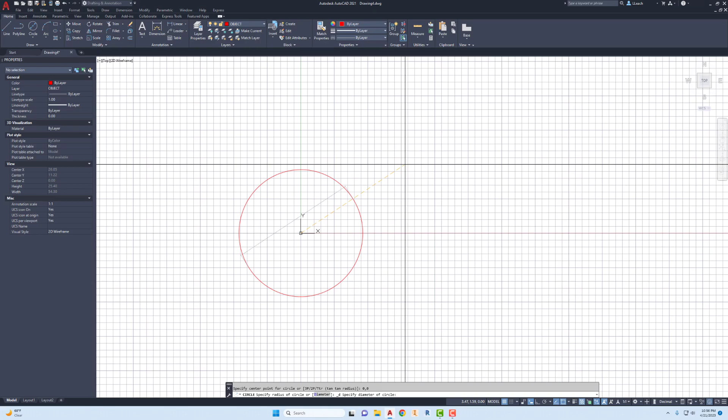Press enter. Let me pan over here a little bit. Then the diameter of the circle, I'm going to do the smaller one first, so that has a diameter of 1. Just going to type in 1, press enter. Let me zoom in a little bit.

I'm going to make another circle with the diameter, and click on the center of the circle. If you don't see that little green circle pop up, go over to your object snaps and make sure you have center selected. Also make sure you have endpoint selected because we're going to need that in a minute. I think all the other ones are fine, so that's probably all you need is endpoint and center checked. I'm gonna click out of this.

I'm gonna start a circle, center, diameter. My center is here, I'm gonna drag it out, this is gonna be a diameter of 2. Let me pan out a little bit or zoom out a little bit. Actually, what I'm gonna do is turn my grid off because that annoys me. Turn that grid off like that.

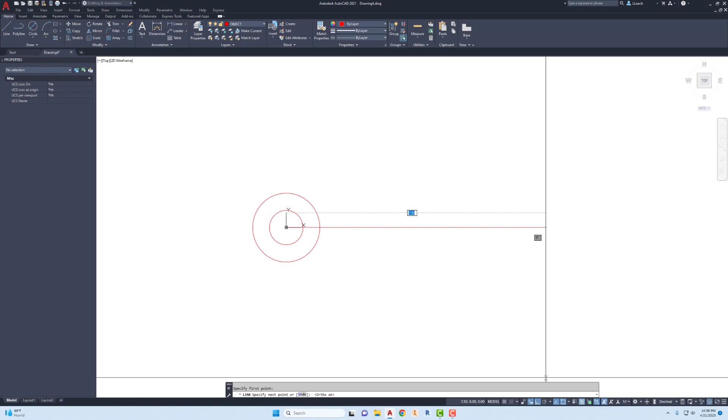So what I'm gonna do is draw a line from the center of those two circles straight over to the right. If you notice, I'm kind of at an angle. To make sure I get this perfectly horizontal, I'm gonna click on my, what is this called? Oh yeah, the ortho mode. So now I can drag it over to the right. That's gonna be 3, so I'm gonna type in 3.

Hit the escape key. I'm gonna draw another line from the same center point here. This time I'm gonna come over, I'm gonna type in at 3, and then I want to do the less than 40. So that's gonna be a line that's 3 units long at a 40-degree angle. I'm gonna press enter and hit the escape key.

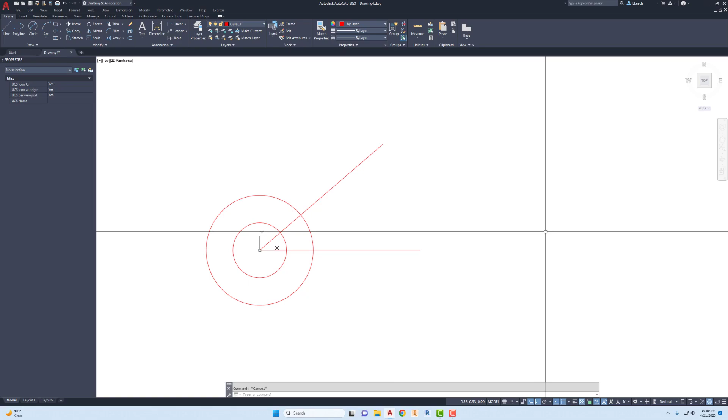So there's those two. The reason I did that is that's going to determine where the center lines of these other circles are going to be located. So I'm given the radius of those circles, so I'm going to go circle, radius.

I'm going to select the endpoint of this line as my center and drag it out. The radius of the first one is going to be 0.5. I'm going to do another circle radius, same center, that's going to have a radius of 1.

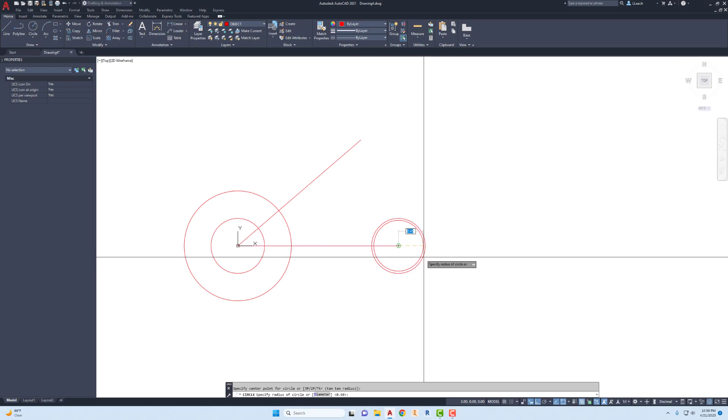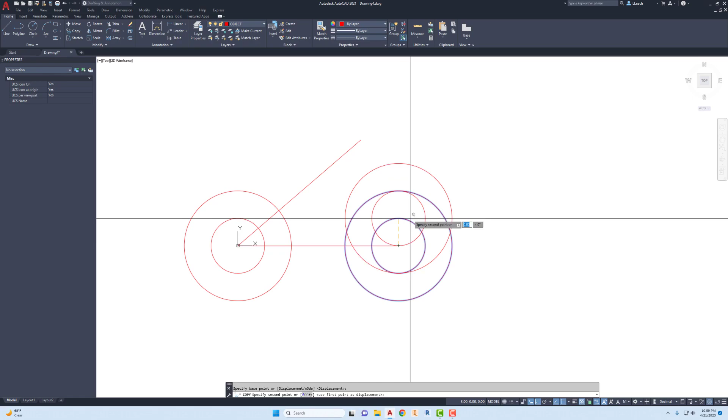And then I could either do that again for this angled line, or I could just do copy. I'm going to copy these 2 circles here, press enter. My base point of this copy is going to be the endpoint of this line, and I'm going to copy it to the endpoint of this line. Press escape. So there's our circles set up.

So next thing we need to do is we're going to create the arcs that create the shape of this object.

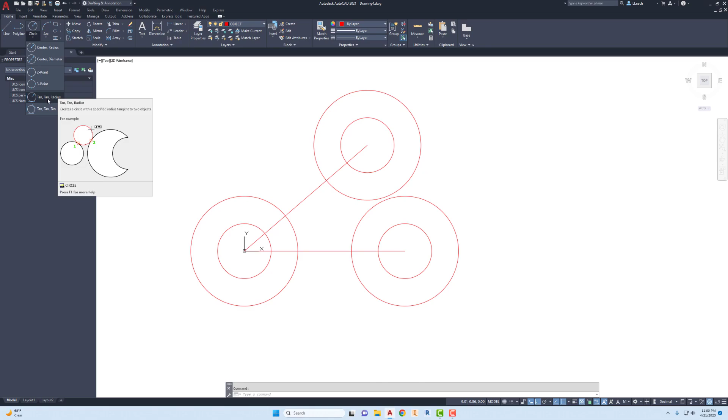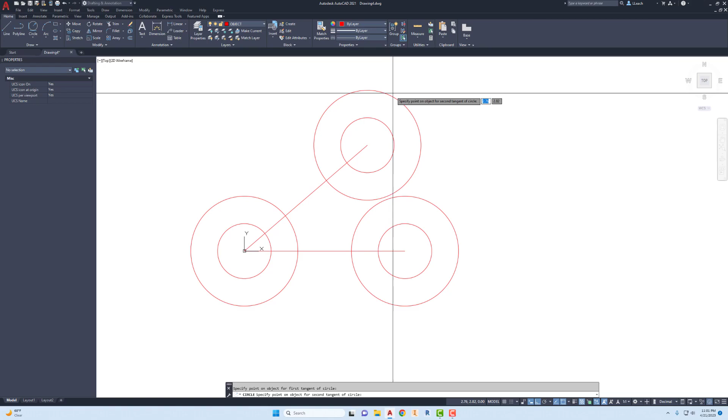To help make this shape, I'm going to create this first arc. Instead of using the arc command, I'm going to go under the circle and look for the tangent radius option. I'm going to click the tangent of this circle, making sure I select a spot on the circle out over here somewhere. You don't want to do it inside, because that's going to create an arc going the way we don't want. So I'm going to pick a point over here on this circle, and a point on the other side of this circle. Then for the radius, I'm going to type in 5. It creates that all the way around, but I don't need all the way around, just this little part. So I'm going to go to trim and select somewhere on the circle to trim that piece out. So there's our first arc.

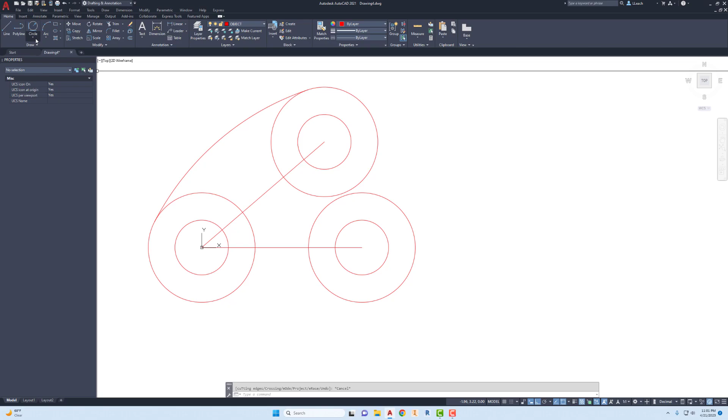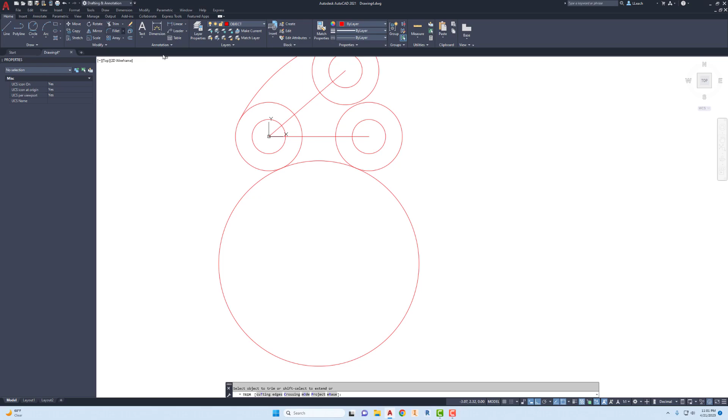I'm going to do the same thing for the others. For this one down here on the bottom, I'm going to click circle, tangent radius. This time I'm going to select inside the circle on this side, somewhere over here. And my radius is going to be 3. Again, I don't need that entire circle, so I'm going to trim this out. And we're moving right along.

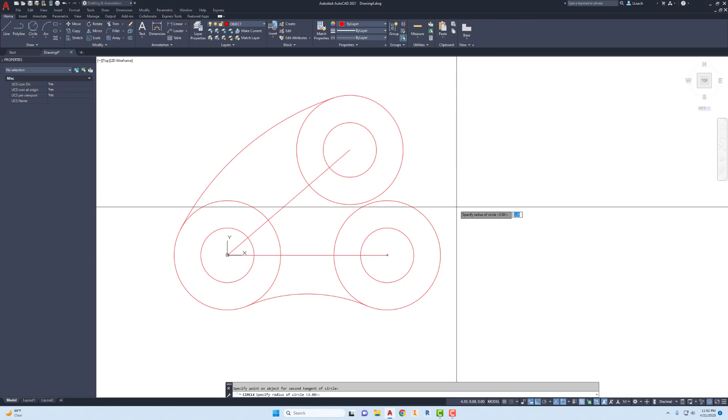Then for the outside border over here, same thing: circle, tangent radius. I'm going to select a point on top here of the circle, and select somewhere on the bottom. And that radius is going to be 4. Again, I don't need that whole thing, so I'm just going to trim this out. And then we have our outer shape going on there.

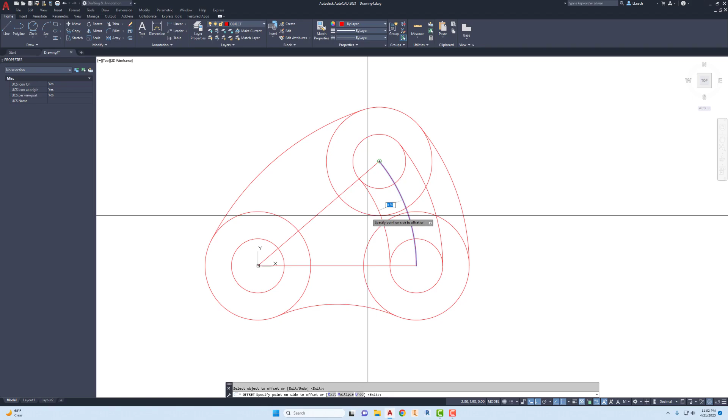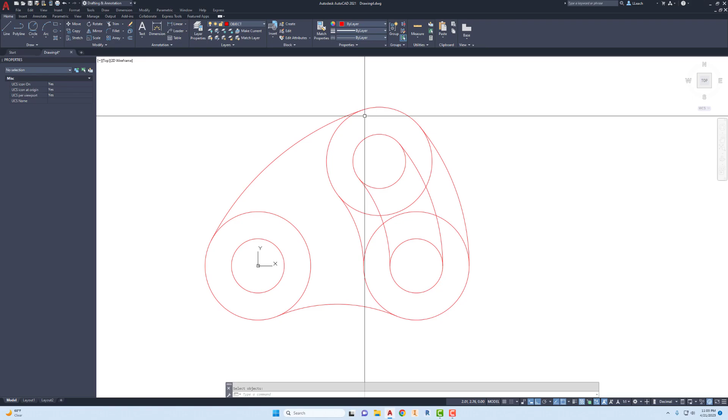So there's a couple things I could do to finish this off, but I think the easiest is to use the offset tool. For my offset distance, I'm going to type in 0.5, and select this arc here, offsetting it to the left. I'll select this one, offset to the left. Select this one more time, offset it to the left. Now this center one I don't need, so I'm going to erase it, usually just typing E for erase and enter. I also don't need these over here, if I'm being honest, and I try to be, so get rid of those. Then I'm just going to trim out the stuff I don't need here, trimming this, and this, and this, that. I don't need this, I don't need that. So there's our shape for our adjustable support.

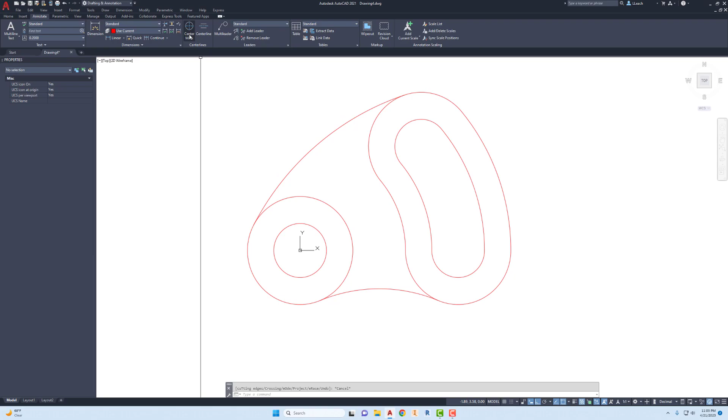We don't need to go in and put dimensions on there. But if you want to get really fancy, you could go up to annotate, go to center mark, and select the outside circles of each one: 1, 2, 3. I would probably put those on a different layer. Let me go ahead and do that. That should probably go not on the object layer, but a new layer, named center mark or just center. Probably make this not red, something a little lighter, maybe one of these gray colors, 8 or 9. I like 8. The line weight wouldn't be 0.3, it would be something like maybe 0.15.

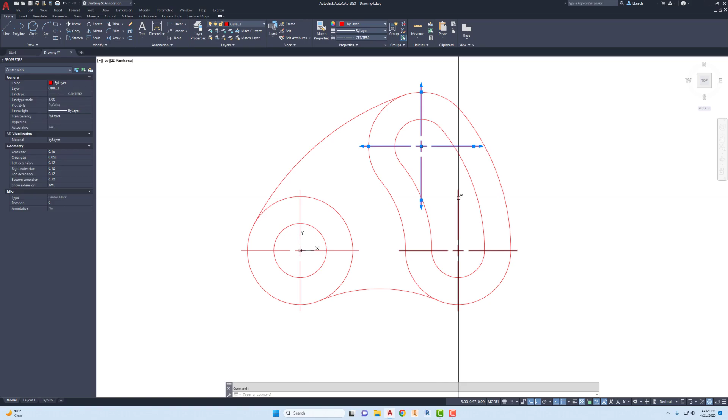I don't need to make that the current layer, because what I'm going to do is close this box, select these center marks 1, 2, 3, and then go up to object here and click on center, and it changes the layers for me. So there's our completed adjustable support.

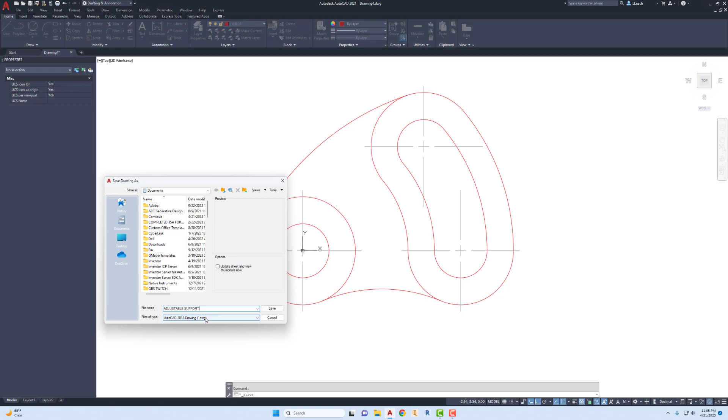So just make sure you go through the different ways to save it. File, save. You can just type in adjustable, if I can spell, adjustable support. Yep, make sure you save as a drawing and hit save. And there we go, we're good to go for that one.